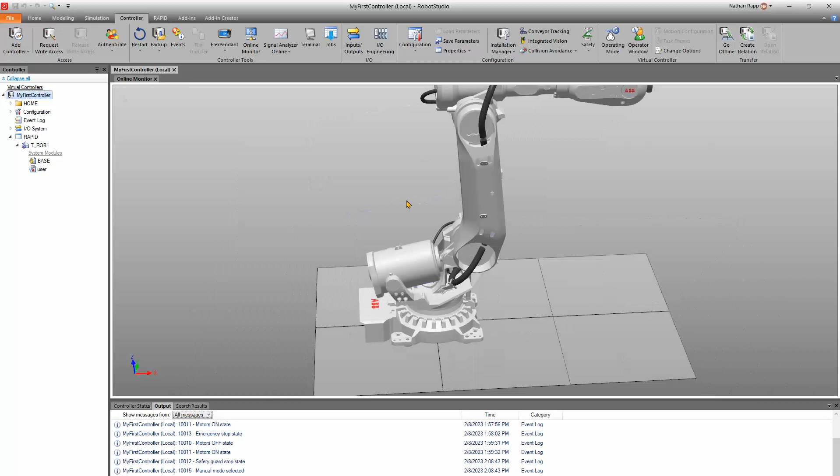In virtual, you can't physically see the manipulator move, right? Unless you launch this online monitor feature. And we select which robot we have. There's two variants. We have this one. And now we can visualize what our robot's doing. And this should be representative of what the real robot is actually doing, assuming you're connected to it.

So now we can come over here. We've enabled the Teach Pendant, and there's a nice little screen here called the Jogging screen. And this shows you your jogging robot 1, and there's different modes to jog this robot. Right now it's in axis 1 through 3. And this is our joystick.

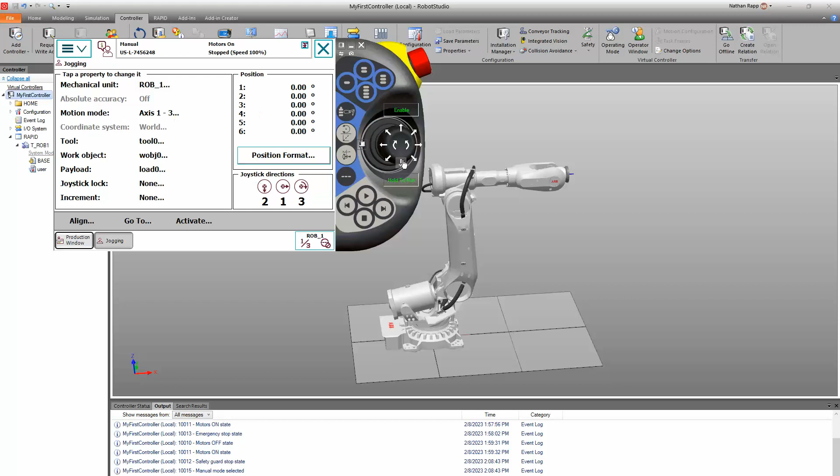And if we come back over to the pendant, this image of the joystick in real life, you can take this joystick and jog it in 3 primary directions. 1 is left to right, 2 is up and down, and 3 is you twist this joystick and it'll allow you to move differently. And what this jogging screen does is, 1, it tells you that you're in 1 to 3 modes. You're jogging axis 1 to 3, and it shows you the position of the axes. And it also shows you what joystick direction is going to do what.

So if we come over here, you can see that if we go left, we should be going positive on axis 1. And over here, yep, we're going positive. So opposite, we go negative. Same thing with axis 2. If we hold it down, we're going to bend around axis 2, go up. And finally, for 3, that twisting motion does axis 3.

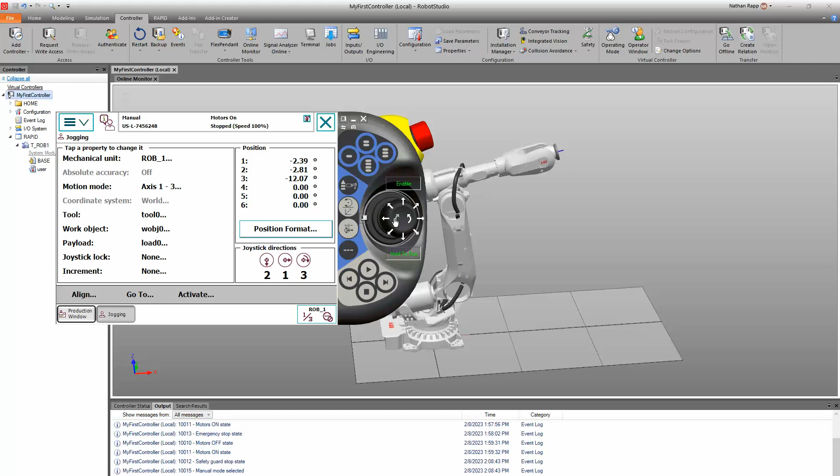If you're not familiar with how robot joints are labeled, it goes from the bottom up, starting at 1. So right here, this rotation spinning around here is axis 1. Spinning around axis 2, it'd be this point right here. Spinning around axis 3, axis 3 is right here.

Now, there's 6 joints total, so if we want to switch over, we have 2 methods of doing it. We can come over here and click on axis 4 through 6 and hit OK. And now we're in 4 to 6. Now with our joysticks, we can see this rotation around the shaft is for 4. So we can go positive and see that that spins. We can go on axis 5, which is right here at the wrist. And axis 6 is the spinning of the faceplate.

Notice as we hit this button, it transitions from 1 through 3 to 4 to 6. Over here you can also see your jogging mode. So you don't necessarily have to come to the jogging screen. You also can switch it right here. You see this, you can click on this button and it'll switch you between 4 to 6 and 1 to 3 just by hitting this button. So that's another easy way to go ahead and change your motion mode.

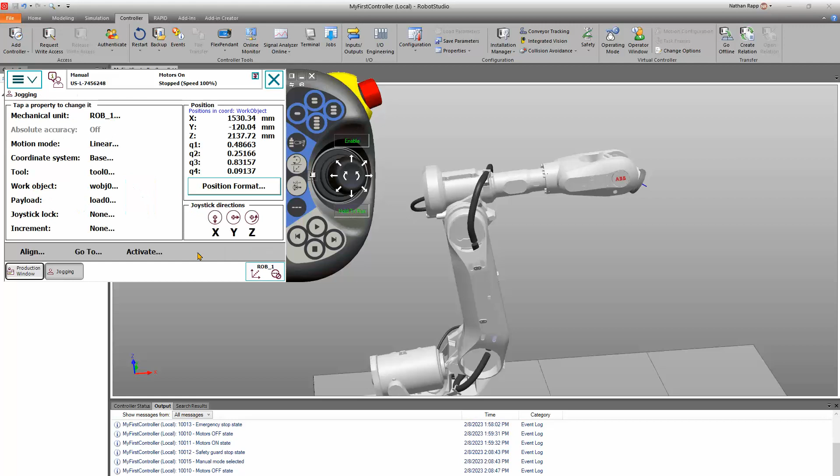So we've jogged this robot joint-wise, but now we want to jog this robot linear-wise, because if we want to go up and down in a straight line, it's really painful to do that just by controlling the joints. So we can come over here and switch it into linear mode, and it's going to take the active tool, which in this case, there's no tool, so it's just going to jog this faceplate, this point right here, linearly up and down. And just as we did before, you can look at this jogging screen and see the direction.

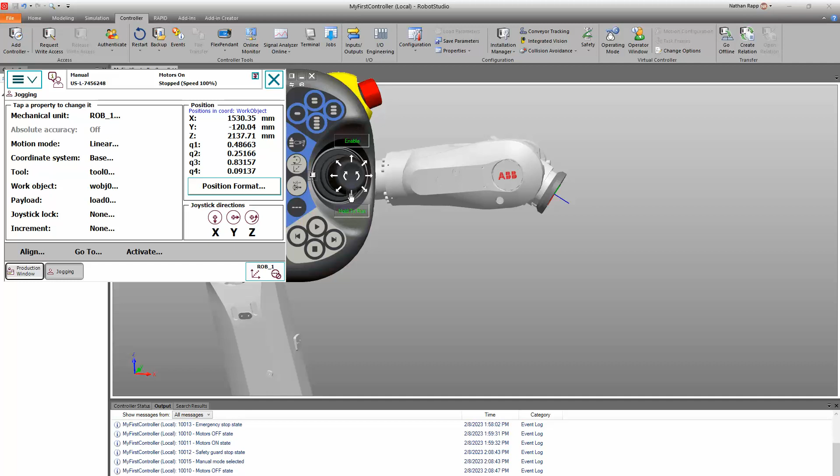Luckily in the virtual environment, we can see the world X and the Y and the Z. So we can see where we're going to jog. If we want to go positive in the X, we got to pull it down to us. And now it's going to follow the X-axis. X is that way. If we want to do the Y, Y. And if we want to do Z, up and down. Up and down.

Notice that as we switch between joint motion, right here, where we can see our axes values, if we switch over to this, we're jogging in Cartesian coordinates, so we can see our x, y, and z, and our rotations. So we can visualize all that information on the jogging screen.